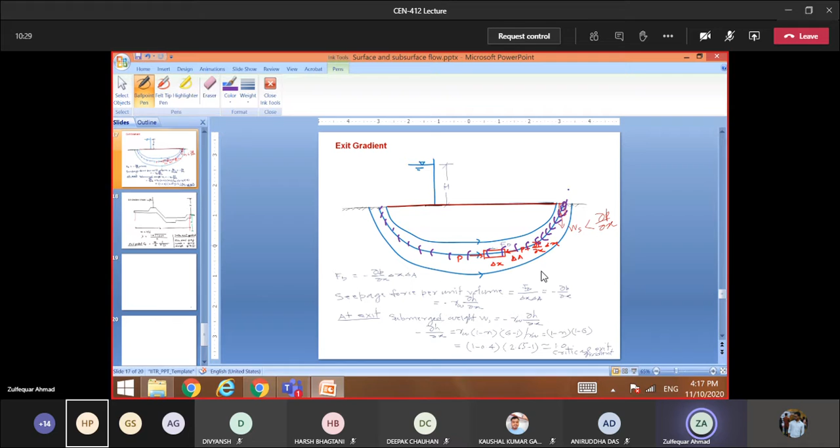That will dislodge from here, and that will leave the cavity. In that way, you see that cavity move upstream. This is just a matter of few hours, right? A complete pipe develops below this structure, and water starts flowing through this. Within 1 or 2 hours, you see this complete structure washed out. So this is the so-called piping action.

This is the piping action. So if you consider the general value of the porosity and the value of G, which is about 2.65, in that case this critical exit gradient comes out to be unity. So the safe exit gradient we have to keep lower than unity. And I had shared with you what should be the safe exit gradient for different soils.

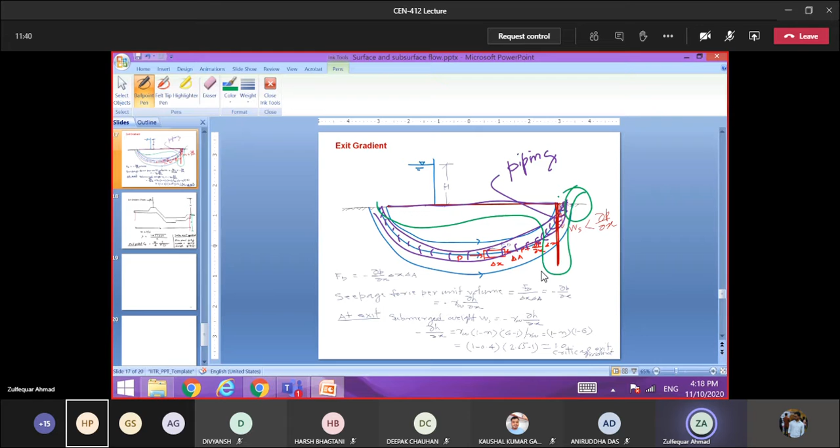Since this is a horizontal floor and here we are getting exit gradient unity, what is to be done here is a downstream sheet pile or cutoff that is mandatory. So this downstream cutoff is mandatory, so that the flow follows this path, and in that case the exit gradient will be less than 1, and the structure will be safe.

What would be the exit gradient? That is calculated by Khosla's method. If you have the downstream depth of the sheet pile equal to D, and the base width of this structure is B, you have to calculate alpha. Alpha is equal to B by D. Lambda is equal to 1 plus under-root of 1 plus alpha square, by 2. And then you get the exit gradient, which is equal to H by D.

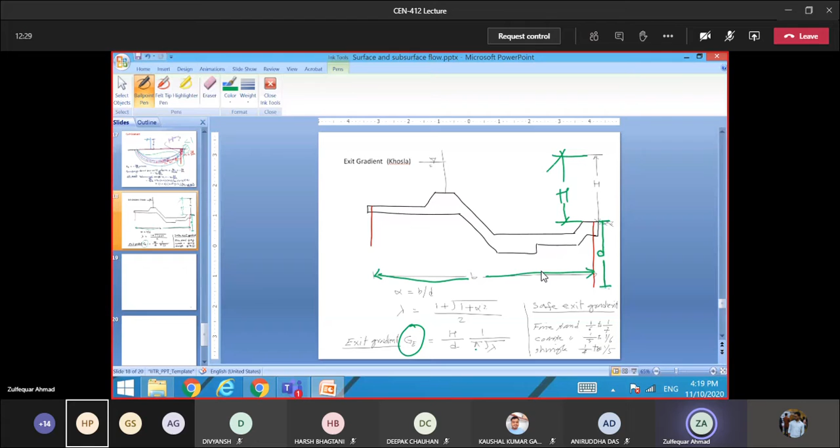So H by D, H is the head which is acting. Let us say in the worst condition there is no water in the downstream, so we consider this one as H, and 1 by pi under-root lambda. For the different types of soil in the IS code, the safe exit gradient is written here. So from this discussion we can conclude that this downstream sheet pile is mandatory, otherwise the structure will fail due to piping action.

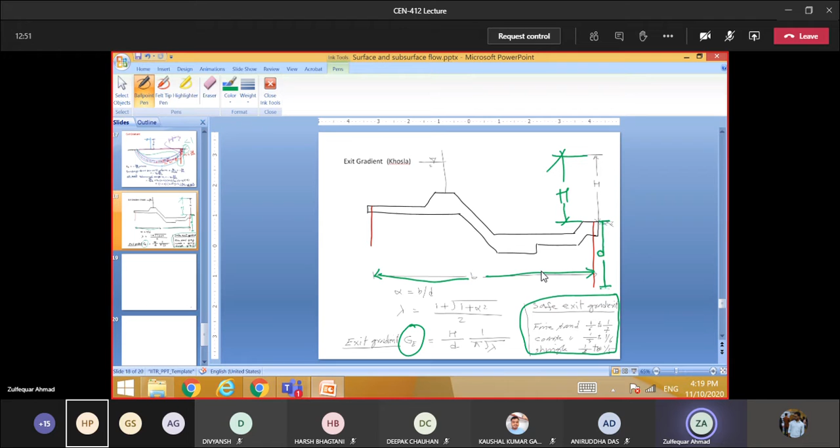If you are solving the Laplace equation, to get the exit gradient, del square H by del Y square is equal to 0. This exit gradient is virtually nothing but delta P by delta X, in terms of Newton per meter, or in dimensionless terms, because the exit gradient is dimensionless, it is delta H by delta X.

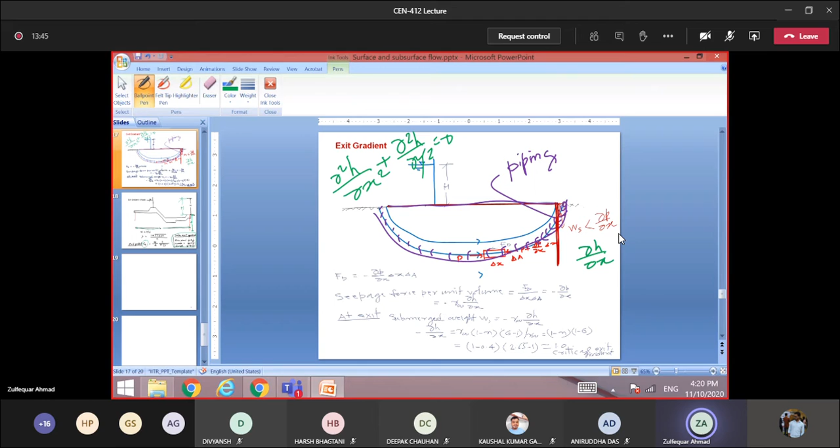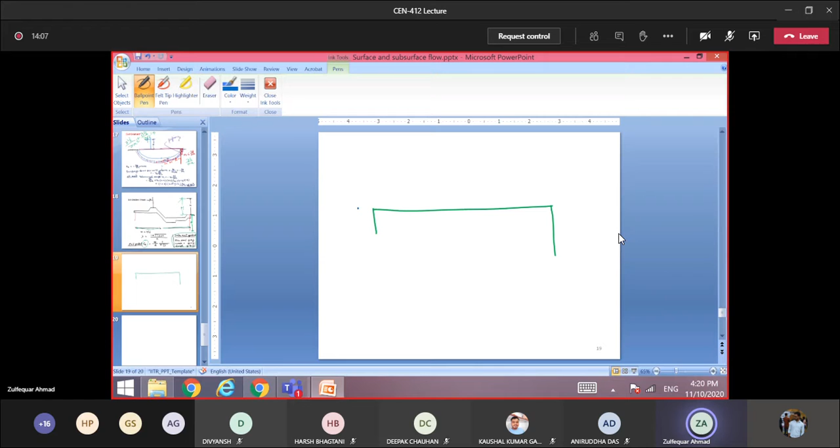Let me explain in the other slide. If you are using some software and you have the structure like this, so you have this floor, the downstream sheet pile, the upstream sheet pile, and the flow going like this, coming out. So here you have the soil, here you have the soil, in the downstream you have the soil. And here is some gate, and you have this water level, this is the head H.

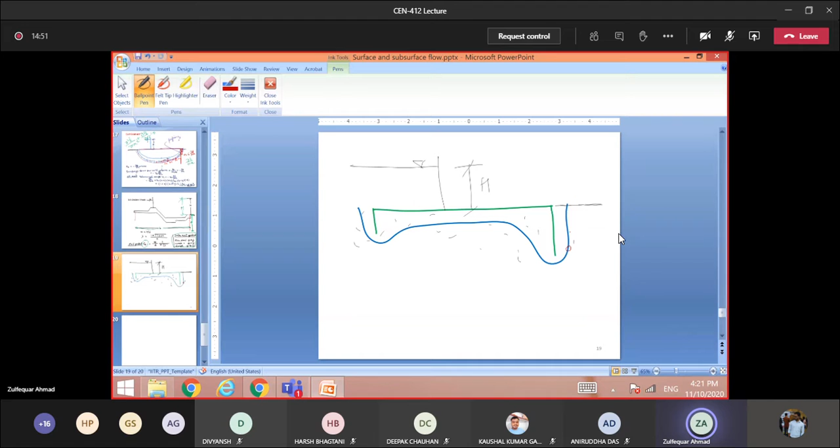By solving this Laplace equation, at all the points you know what is the value of H. So H value at all the nodal points is known to you. To get the exit gradient, you have to take some points, let us say this point, this point, this point, and get the value of H. So get H1 here, H2 here, H3 here, H4 here, and the difference of this is delta H.

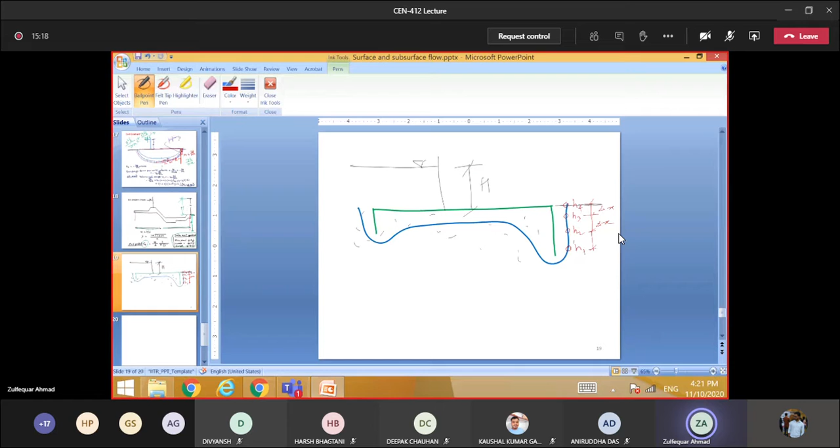So it is advisable not to go only with the exit point. You calculate delta h by delta x for this segment and this, and take the average of this, and this will be your exit gradient.

Let me share. I don't know, I think I can share now. One problem, design problem that I did.

Now, could you see this? Yes, sir.

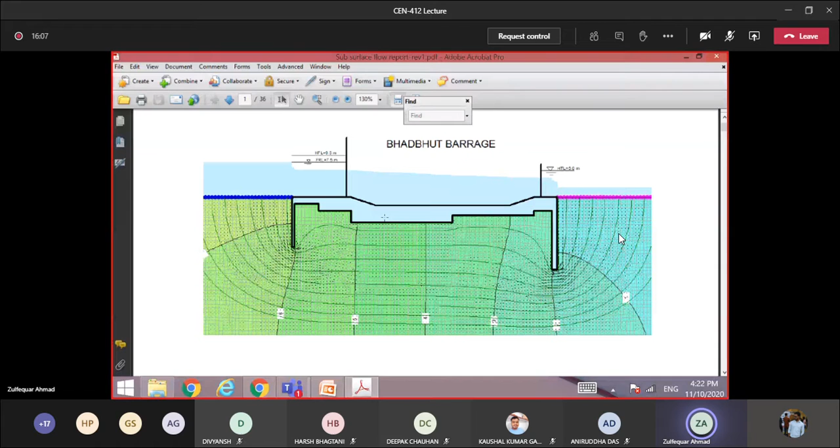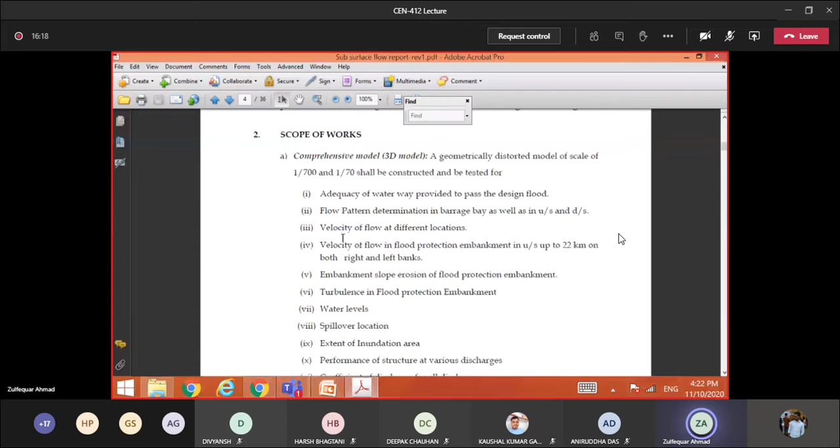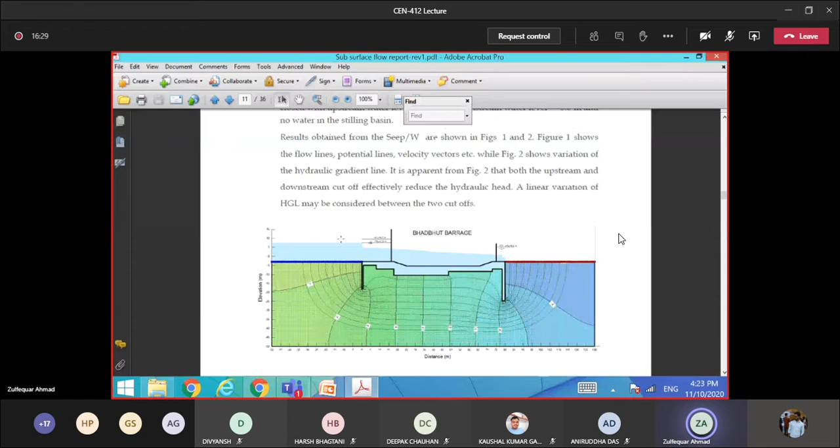Okay, so I am taking a problem here that I solved using the SEEP/W software. This is just for your information, because I did it for a different configuration. This is for the condition, right?

Okay, this is the upstream cutoff, this is the downstream cutoff. And could you see the flow lines here? These are the flow lines which are going, right? And these are the equipotential lines you can see here, right?

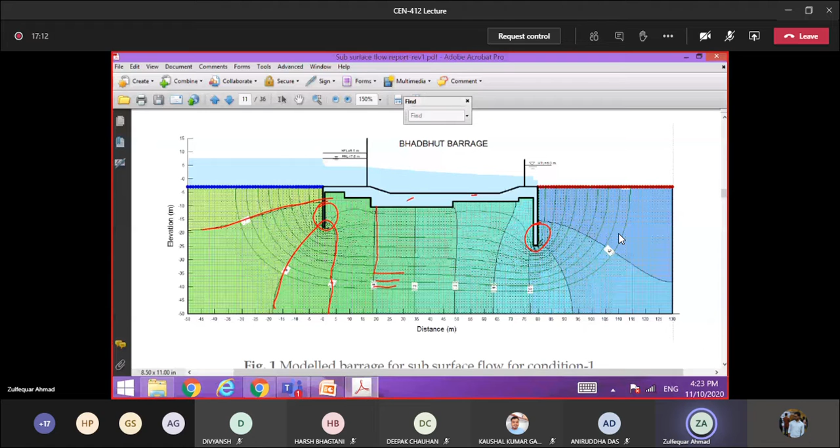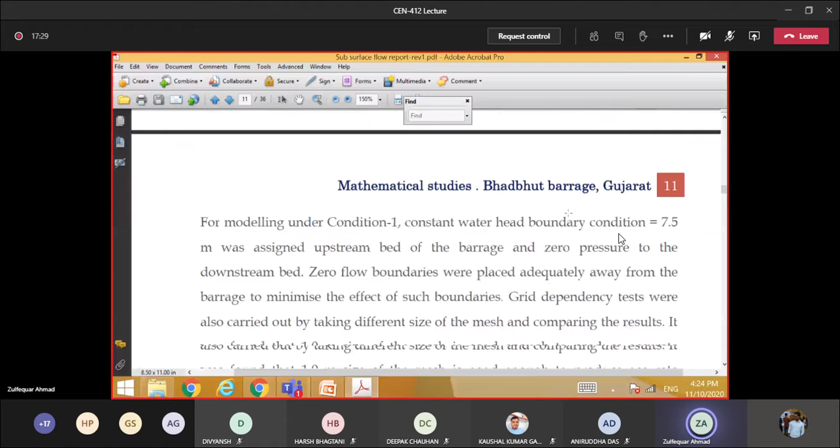Could you see this? So you can get all such things by solving the Laplace equation, right? Using the Laplace equation, these are the equipotential lines, and here these are the flow lines, okay? I think you can see this, right?

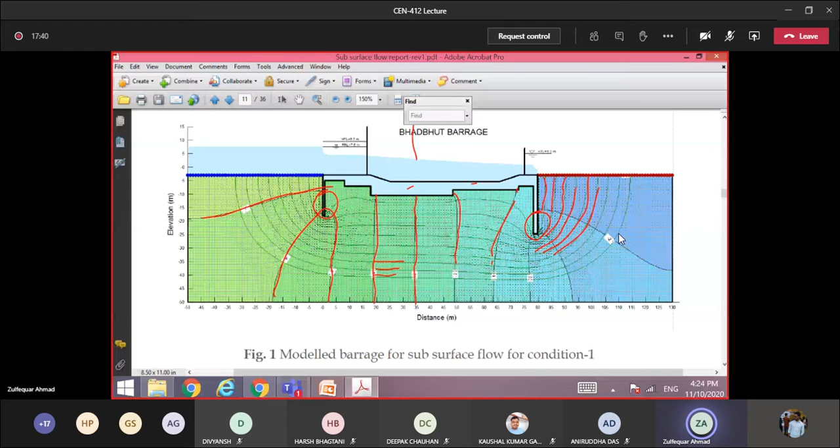Yes, sir. So at any point, you can get the value of h, right? And what would be this? You see the total head of the water at different locations, that is given here.

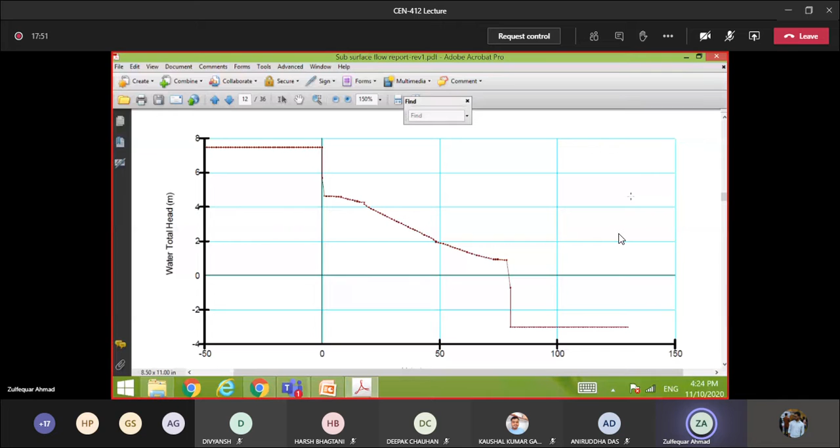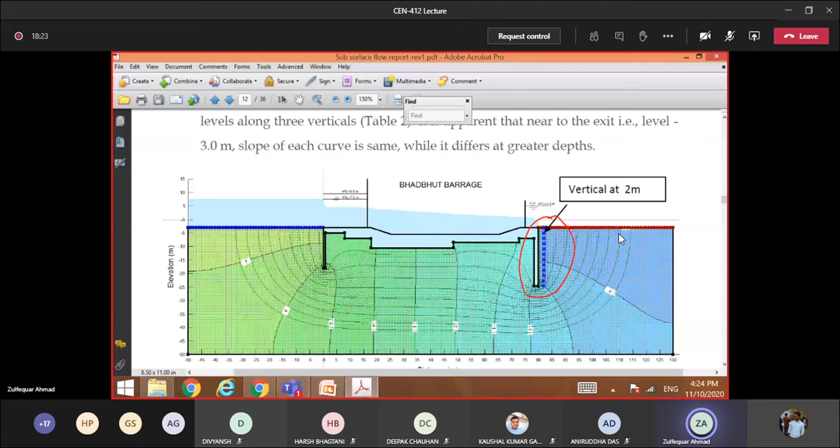And as I explained to you regarding the exit gradient, you can see here, see this point. I had taken a number of points, and at each point I obtained the value of h, and the distance was known to us. Then I calculated delta h by del x, and then I took the average. So that was the exit gradient, and in that way I calculated the exit gradient.

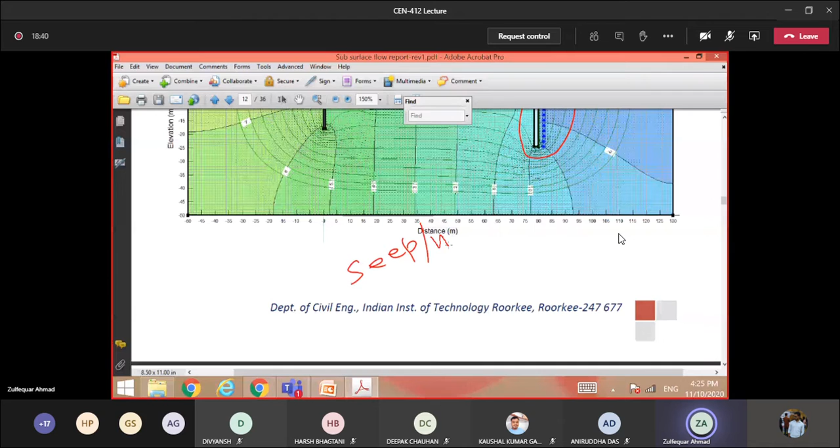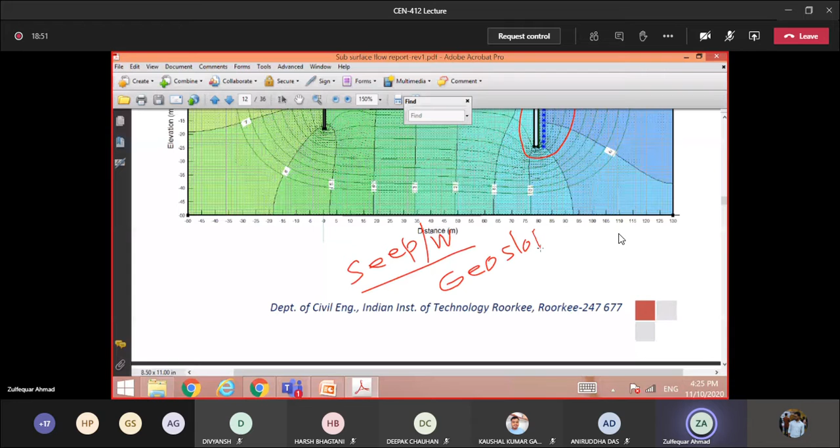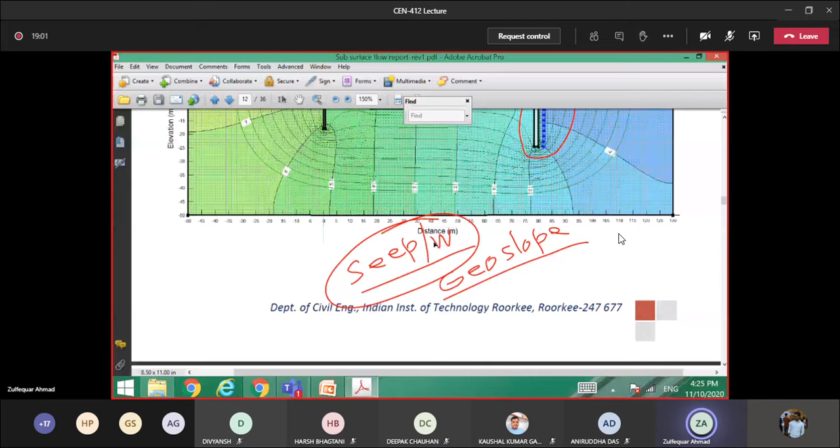So you can use this GeoSlope software, okay, and in that GeoSlope you have this, you see the SEEP/W is the option of the GeoSlope, right? I don't know if you have heard about this or not. GeoSlope has a number of softwares, one of the software is SEEP/W. So you can solve such type of problem using SEEP/W. Okay, any question, please?

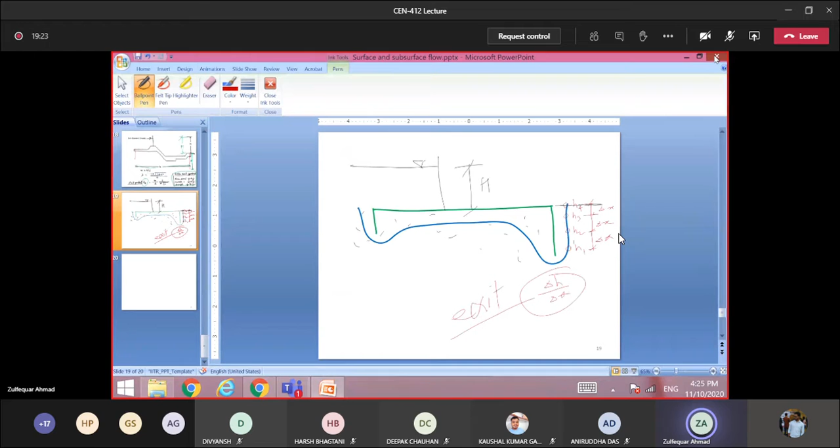So now we have covered this part as far as the surface and subsurface flow is concerned. Now we'll discuss the design of the barrages. If you have any question, please let me know so that I can start this design of the barrage.

Any question, please? I hope you can see this slide.

Yes, sir. So you see, I discussed with you two PPTs, one that is a design methodology of the barrages, I mean design of the barrages, and the second one is I discussed with you a case study, right? For having more clarity about the design, right? So I think you are visualizing the barrage.

So this is a structure which is constructed across a river to divert the water. So here the barrage is for diverting the water, not for storing the water. But there are some barrages which are exclusively for storing the water. But in the plain areas, in general, the barrages are to divert the water into the canal system.

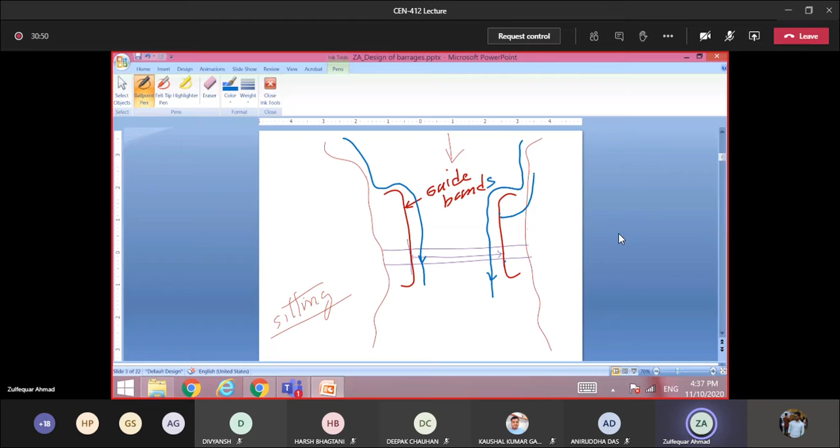These guide bands are provided, maybe on both sides. Maybe this will be a straight type of guide band, or there are elliptical types of guide bands. Sometimes bands are also provided like this - these are so called marginal bands.

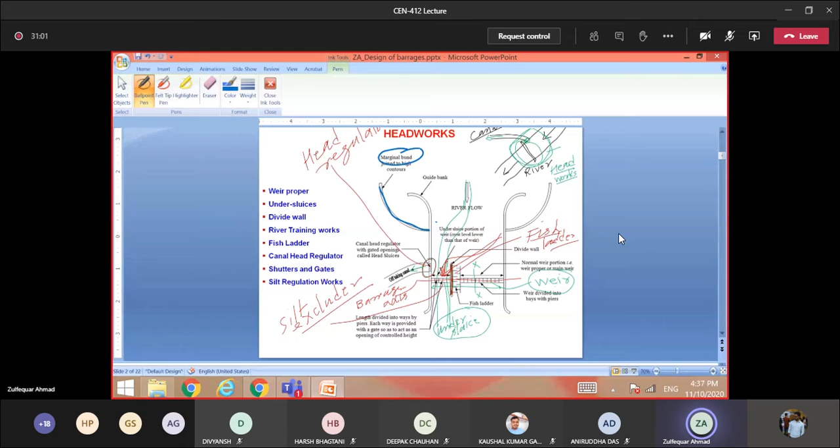This is being explained - this is the marginal band that is being provided here. These are the river training works. So whether it's a guide band, marginal band, or any other structure provided for training the rivers, we call these river training works.

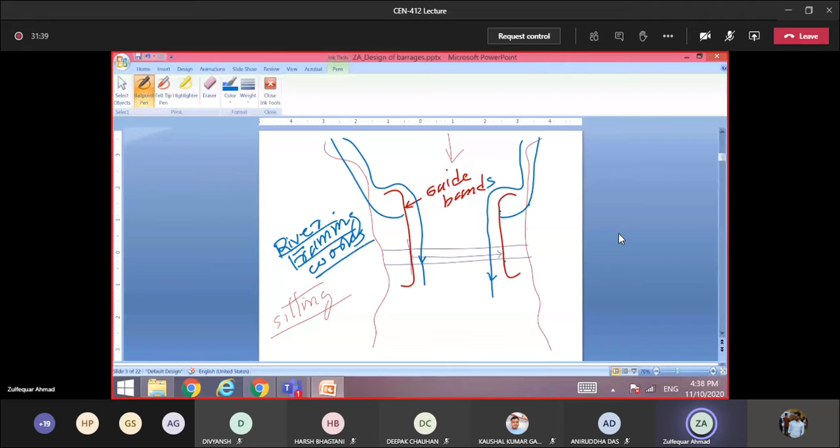In this river training works, this is to train the river. You have the guide bands, the marginal bands, the spurs or groins, the pilot channel, and other structures also for training the river.

We'll take these one by one as I discussed. Once we have this barrage, we have to divide it into two parts - here is the divide wall. Let us say we are taking a channel from this side, so we have to provide the under sluice here. And if we are taking a canal on the other side also, the under sluice is to be provided there too, meaning we have to have two divide walls.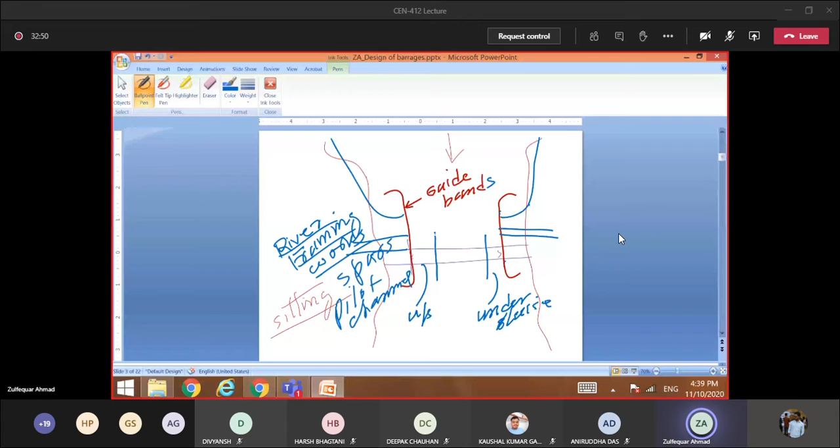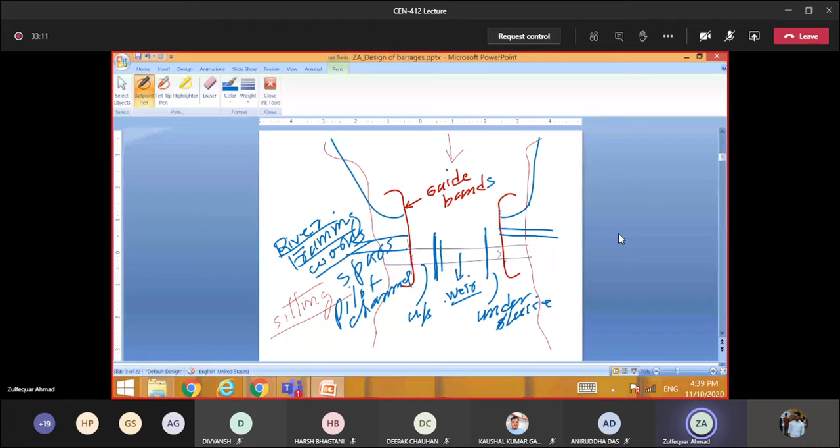As far as the fish ladder is concerned, you can provide it on this side or that side. If taking canals from both sides, you have to provide the under sluice on both sides, and this would be your weir proper part. So this is the arrangement of the head works. We have to talk about the design of the barrage - barrage meaning this weir portion, the under sluice portion, and the divide wall. We will not go into detail on the design of the fish ladder, but we'll discuss the under sluice, weir, and all those things.

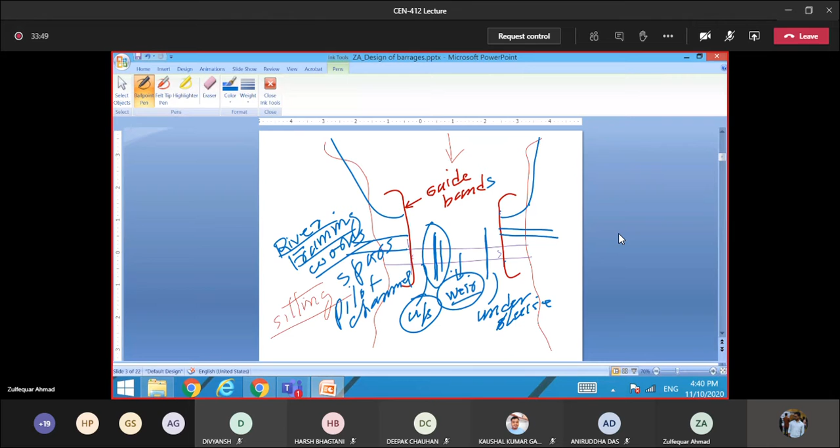If you have any question, please let me know. Any question, please? Yes, please.

Do you think this would be a suitable site for locating the barrage? This is a question, and you will get marks.

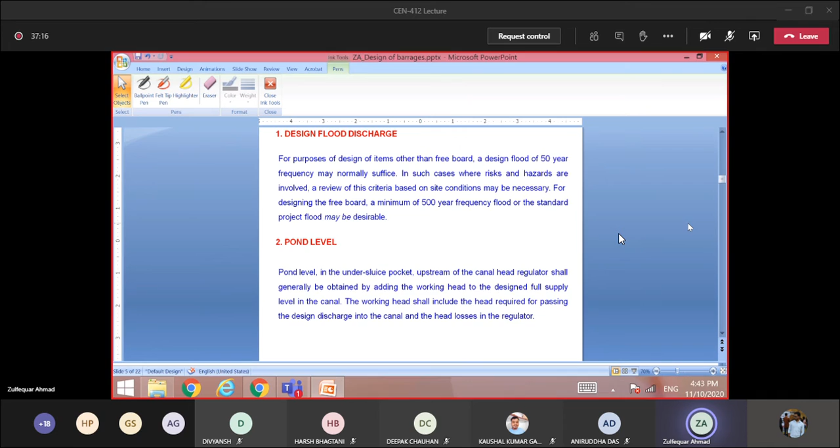Now we'll discuss the various aspects of the design methodology of this barrage. Once we are designing the barrage, the first thing that comes to mind is, as I told you in the beginning, as far as hydrology is concerned, we are concerned with two things. One is, what is the peak discharge? Because that peak discharge is required to design the structure.

And the second one is the water availability, because you have to divert the water, and that water will be used for various purposes. So you should know how much discharge is coming at that location. But here we are not talking about the water availability, because here we are talking about the design of the structure.

Our structure should be designed in such a way that it can sustain the maximum discharge which is expected. For getting that maximum discharge, in the case of barrages, unlike dams where we go for the probable maximum flood, here we are not going for the probable maximum flood. Here we are going with the discharge corresponding to some return period.

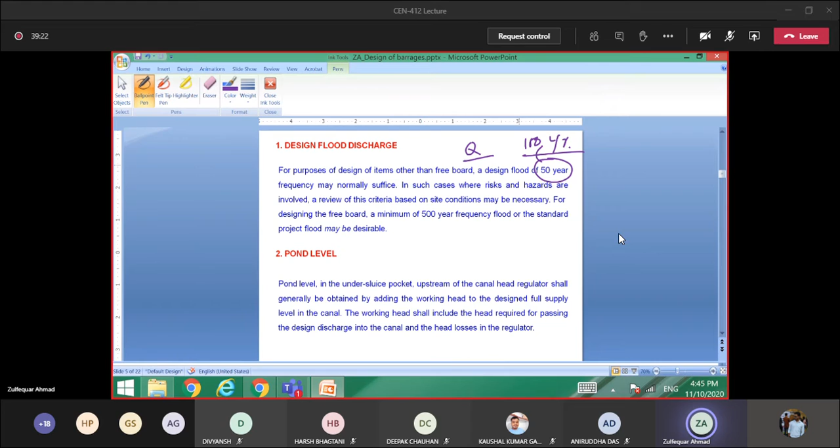May I know some methods of the frequency analysis for getting the discharge for a certain return period? This is again a quiz question. I think you might have gone through it in the course on hydrology. Could you tell me some methods for estimation of the peak discharge, flood discharge corresponding to some return period, maybe 10 years, 50 years, 100 years, 500 years?

Sir, flow duration curves.

No. Flow duration curve is for the water availability, not for the peak discharge. From the flow duration curve, you can get the idea that for 50% of the time, how much discharge is available, or 60% of the time how much discharge is available. That is related to water availability. Here we are talking about the peak discharge. We have to design our structure for a peak discharge so that the structure does not fail.

I think in the frequency analysis you might have gone through Gumbel's method, the log Pearson method type 3, and the log normal method. So there are many distribution methods for calculating this peak discharge for a certain return period.

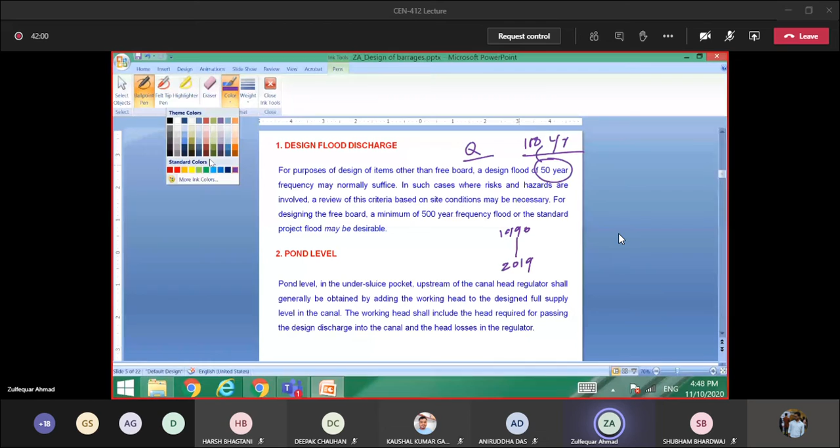So this comes out to be 30 years, and every year you know what the maximum discharge was. Let us say I'm talking about the Ganga River at Haridwar. In 1990, let us say, just giving a figure, not the actual value, you have 4.6 lakh cusecs discharge. Then you have 4.8, or 3.9, or 4, something like that. So you have this series of data.

Now this series of data will follow some distribution curve. If it follows the Gumbel distribution curve, we can get from this what the discharge value will be for the 50 years return period, the 100 years return period, or the 500 years return period. Through this frequency analysis we get this value, and that value we have to adopt for the design. So in the IS code it is written 50 years, but nowadays barrages and bridges are constructed for the 100 years return period.

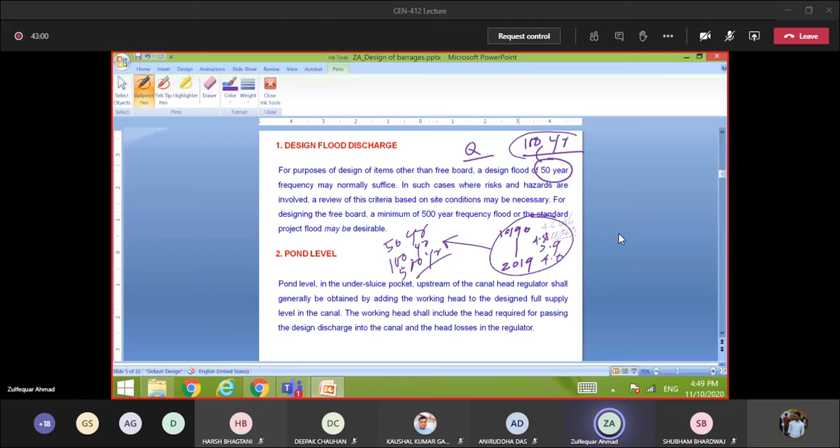The 500 years return period discharge is considered for fixing the freeboard. In the design of the barrage, whatever maximum water level you get, the top of the wall has to be kept higher than the maximum water level. How do you fix the top of the wall? You fix it on the basis of the 500 years return period. The water level corresponding to 500 year return period, and the water level corresponding to 100 year return period, the difference of the two will be the freeboard.

Now coming to the pond level. Let me introduce a slide here.

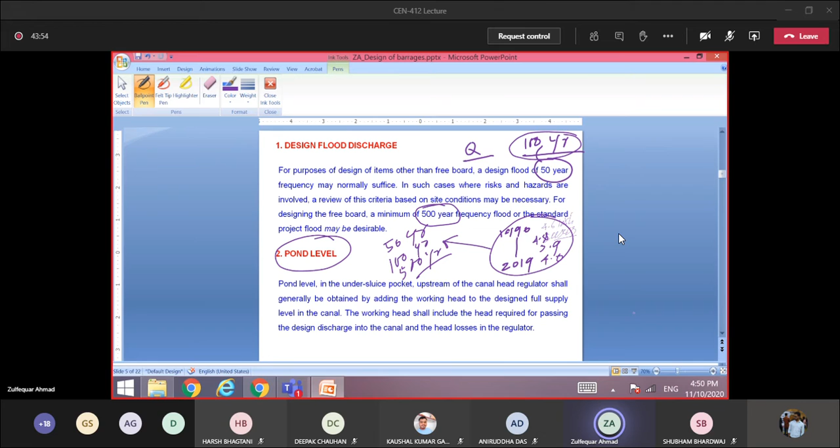This is very interesting, but of course we are not physically there.

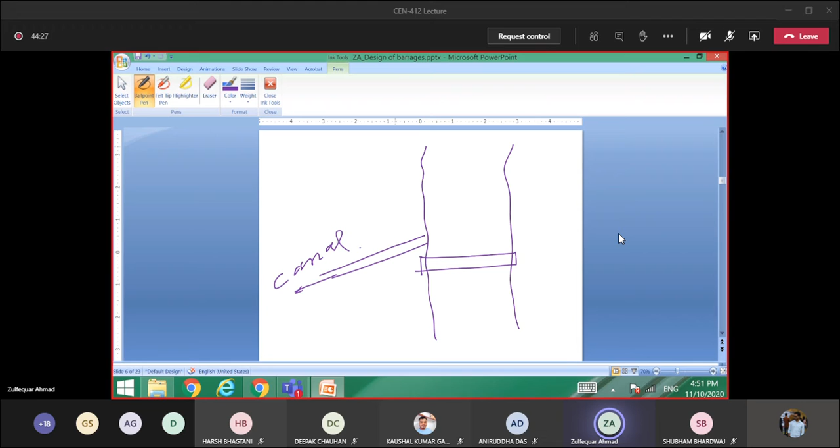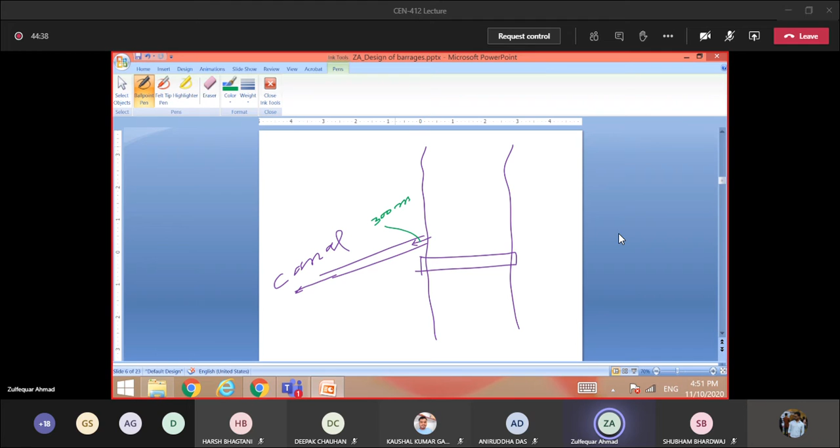See, this we have. This is a river, and we have put a barrage here. This is the canal taking off from here. Now to pass a certain discharge going into this canal, let us say we are talking about the Upper Ganga Canal. Let this be point A, and in the downstream is point B.

Of course, there should be some difference in the water level. At this point, the water level should be higher than at point B, right? Only then would there be flow from A to B. Now, how do we fix this water level at point B? Because this is the full supply level of the canal, that is known to you. And once the downstream water level is known, you can get the upstream water level.

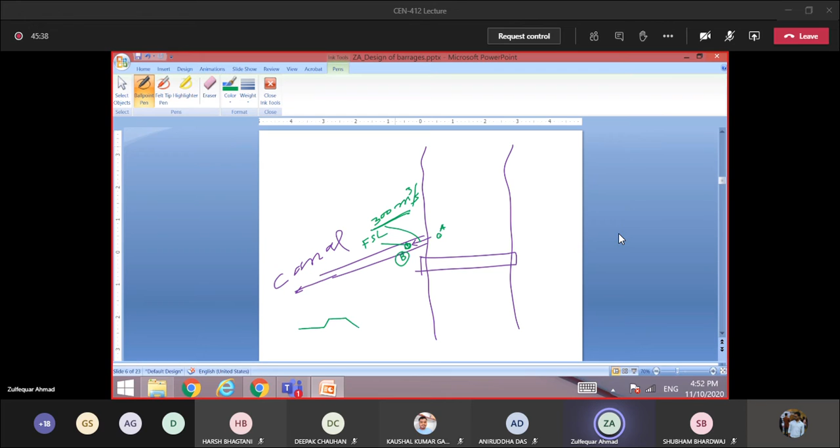Invoking the discharge equation of this head regulator. So let us say the head regulator is like this. This is the head regulator, and the downstream water level is this. The flow is from this direction. So this is the full supply level or the downstream water level. And this discharge going in this canal, I am writing QC.

QC means the discharge going in this canal, which is known. And let us say you have fixed the width of this head regulator, which is known. For these geometrical parameters, what would be the water level in the upstream? I mean, how much will be this head difference, Delta H? So this much Delta H is required to pass this QC.

Now, could you tell me if the water level in the upstream is also the same as the water level in the downstream, and the velocity head is same for both cases, do you think there will be flow? My question is: water level at point A and B are both at the same level, and the velocity head is also the same. Do you think there would be flow in this canal, the water from the river that will go in this canal?

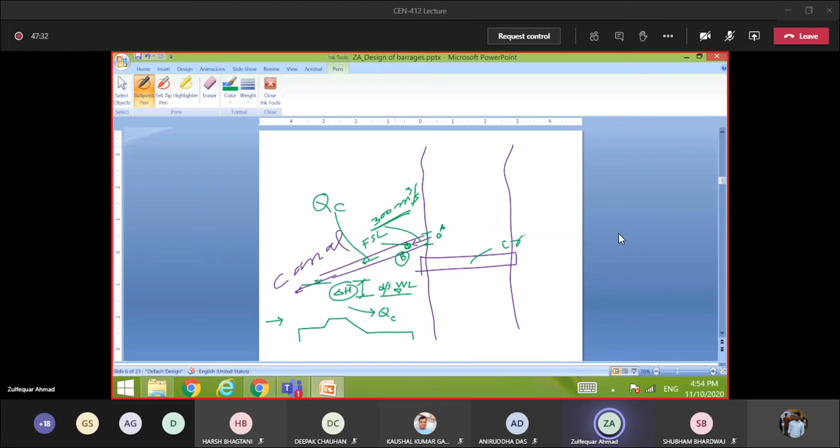No, sir. No. So you need some head. So now how much will be the head at this point A? On that basis, you have to decide this barrage, what will be the crest of the barrage, what would be the height of the gate and other things. And that means you have to maintain a water level here in the upstream so that the design discharge can be passed in this canal. And that water level we are calling the pond level.

This is a pond level, meaning this is the minimum water level that you have to fix here, so that you can divert the required discharge into the canal. So this is the pond level. And what is the criteria of this pond level? Of course, from this discharge equation, we have to get it.

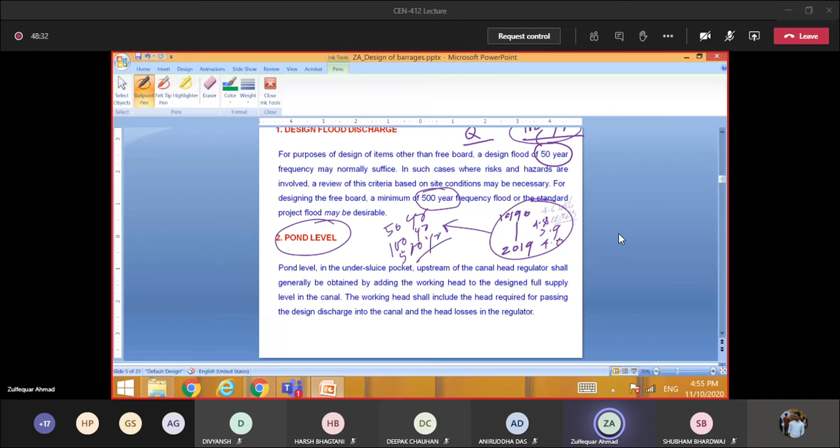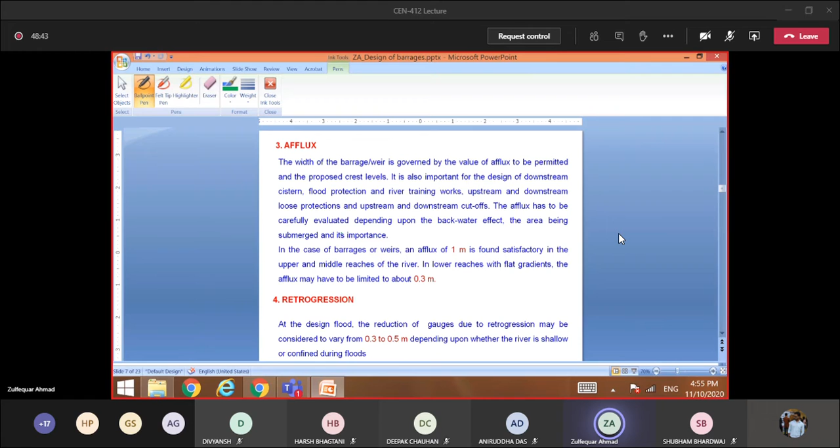However, it is written in the codal provision that it should be about 1 meter upstream, higher than the full supply level, but that is to be calculated by the equation. So this is the pond level. And the other things, what is the afflux, what is the retrogression, and all those things, we'll discuss in the next lecture. Okay, thank you.